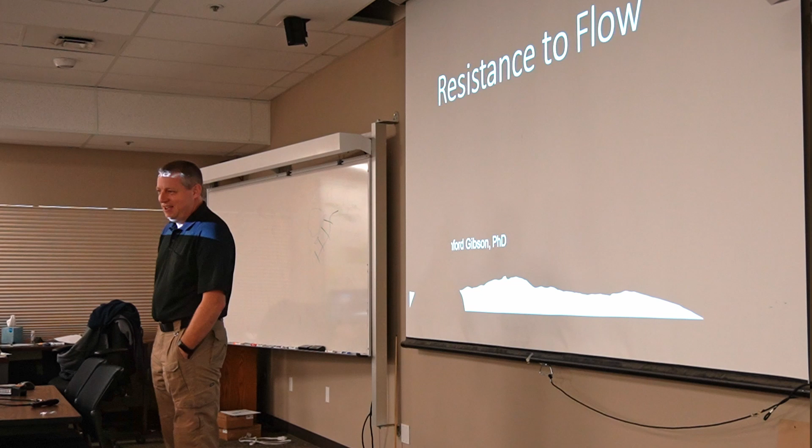They're beautiful equations. And so we tend to sometimes look down at those hydrologists with all their free parameters, and the sediment transport people—what are they even doing, right? Like that's witchcraft. The groundwater modelers, they can't even see all their parameters. We have these beautiful, elegant equations.

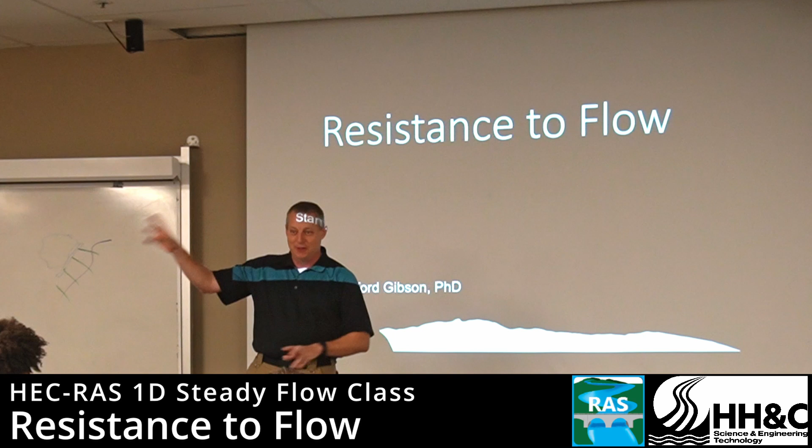Except, do we? We take all of our uncertainty and we put it all in one closet, right? It's like when my kids clean their room—one of my kids will actually go and put everything where it belongs, and another kid will just take everything and shove it under her bed, right? And that's what we do.

We take all of our uncertainty and we shove it under our bed, and that bed is called the Manning's N parameter. Everything that we don't know, we just put into the Manning's N parameter.

So part of the melding between art and science that you're going to have to do as a hydraulic modeler is: you're going to use these gorgeous self-correcting equations, and they're going to do great. And then you're just going to infect them with all sorts of human intuition by choosing a Manning's N parameter.

And that's why we kind of dedicate our whole talk in what is an engineering class to this more intuitive, more felt, more artistic sense of where am I going to come up with this Manning's N parameter.

And so this is the resistance to flow talk. We're going to talk about the flow resistance equations, and a little bit about how this parameter fits into our beautiful equations. Then we'll talk about the factors that affect this, so you know what you're looking for, and then how to determine these.

There's three main ways to determine these: charts, pictures, and equations. There's actually two other ways that I'll talk about, but those are the standards. And then we'll talk a little bit about where these go in RAS, and how you can play around with them in RAS to make them more responsive to what your river is actually doing.

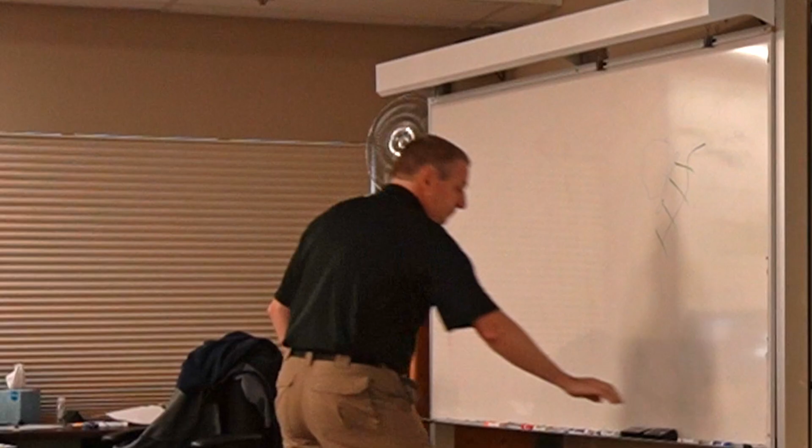I'm going to draw until someone answers. So this might get complicated. The energy grade line, thank you. So HF is the loss of energy between our computational nodes, which in this case are our cross sections, and SF is the slope of the energy grade line.

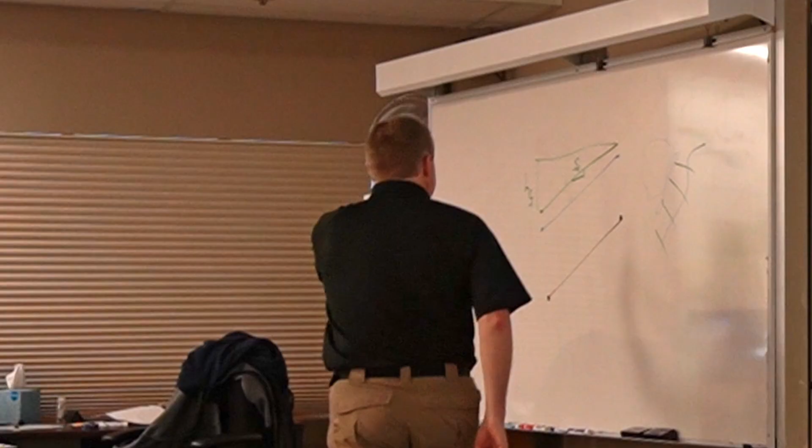Where does that come from? Where does SF come from? How do we compute that? Well, you'll notice there is an S in Manning's equation. That's actually what we solve for, because we iterate on the velocity based on the depth. We iterate on the depth and the velocity, and we solve for the friction slope. The friction slope, this loss, is what we're actually solving for, because we're doing a backwater analysis where we're computing the loss between these. This is what we want, and this is really just the friction slope times this. We get the friction slope from Manning's equation, from the conveyance equation. The friction slope is flow divided by conveyance squared.

What is conveyance? It's a weird idea. What conveyance really is: Manning's equation minus the slope component, times area. It's this conceptual idea of what is the capacity to move flow before you add the driving force, which is the friction slope. But if you just say conveyance is Manning's equation without the friction slope, then the friction slope by definition is the flow over the conveyance squared. And so that's how we do this.

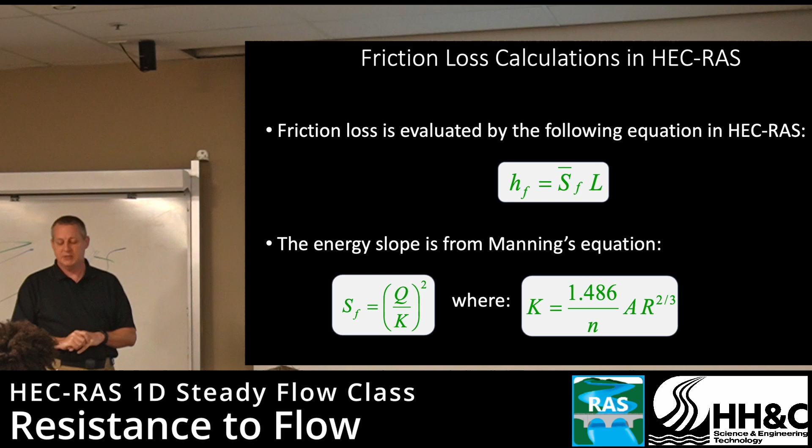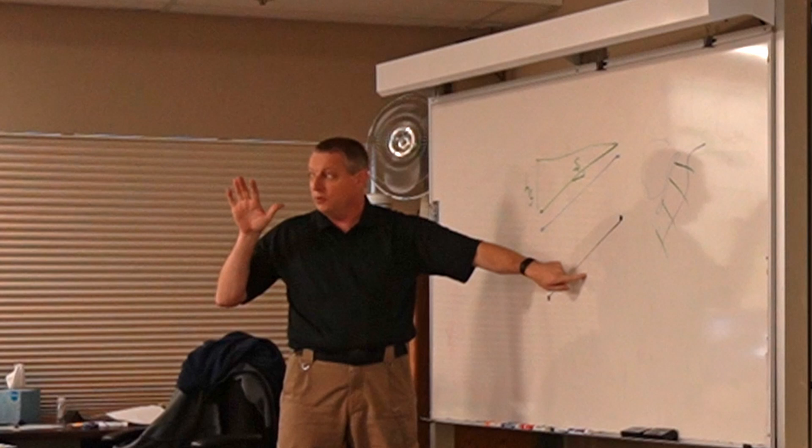That's where Manning's equation fits in. And so if you step back from the convoluted 'what is conveyance' explanation, the answer is: the friction slope, the loss of energy grade, is a function of what? The resistance to flow on the bed, which we quantify with Manning's N. And so now it's turtles all the way down, right? That's kind of how we got here. We're going to use Manning's N to compute the friction slope, which gives us our loss. Okay, so that's how we're going to use it.

Wait, can you say again what conveyance is? Conveyance is weird. Who learned about conveyance? Did anyone else learn about conveyance? I didn't, because it's not a thing. All right, conveyance is not a thing. Manning's equation can solve for V or for Q, right? If you wanted to solve for Q, what do you do?

You multiply everything by A, right? So multiply everything by A, just put an A in there, and now you've got Manning's equation in terms of Q. Okay, what's the driving force of Manning's equation?

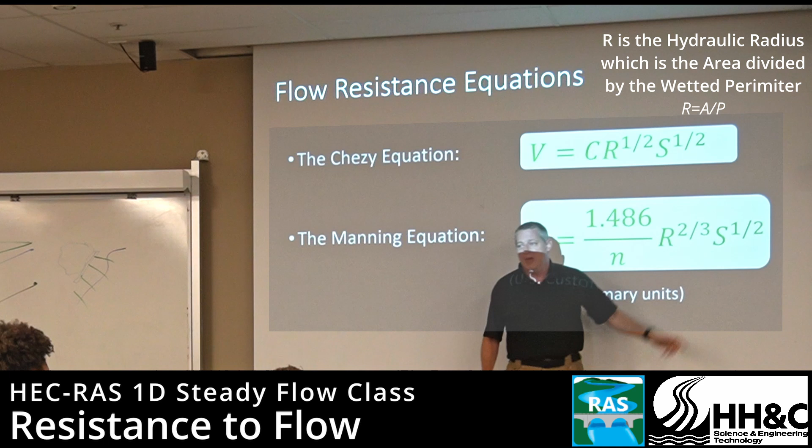I always think about equations like, what's doing the work? What's the engine here? That's partially because I'm in sediment transport and the engines are weird. But what's the driving force? It's the slope, right? None of these other things are driving anything. Actually, it's driving forces versus resisting forces, and then the resisting forces propagate through this. So what's the driving force? It's the slope.

So in a sense, conveyance is Manning's equation minus the driving force. It's the non-driving force portion of Manning's equation, which means essentially it's a flow potential. It's the flow potential that you then multiply the slope by to scale the actual flow potential into flow.

Yeah, the way I've been thinking of it, I just started Googling it yesterday. Okay, tell me if I'm close. So it's basically the ability of a channel to carry water for a given slope.

That's right. So like, for instance, if you have the same cross-section, but it's very shallow, that would be a lower conveyance, because you've got more wetted perimeter. That's right. If you had like a semicircular channel.

That's right. And so if you think about a unit slope, how many slopes do you have? Well, I have one, I have two, I have three. All right, let's just take a unit slope. Conveyance is the ability for your channel to move water given the unit slope.

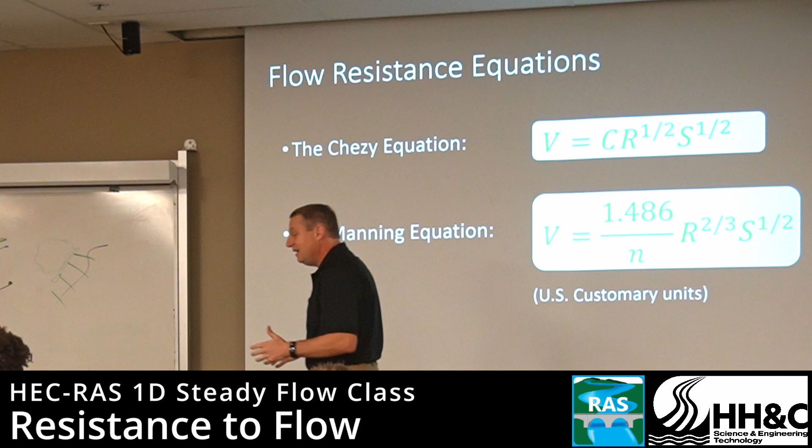If I multiply this now by 2, I'm going to get twice as much flow. So it's a little bit of area minus resisting forces, and then I'm going to apply my slope to scale up to flow. But it's not a real thing. It's more of a numerical trick to isolate the friction slope in our equation. It's Manning's equation minus the friction slope.

What affects Manning's N? When you're going to walk out into the field and try to estimate a Manning's N, what affects it? Well, the first thing that affects it, obviously, is the surface roughness. But we're already in trouble here, because what actually is the surface roughness?

Now you're in my world. Welcome to sediment transport. What actually causes roughness? What sediment characteristics actually cause roughness? Size, the size of the sediment, right? If you've got cobbles, you're going to get more roughness than gravel. Are you going to get more roughness than sand?

No, why not? Why would sand give you more roughness than gravel? Is it because of that? Yes! Sand self-organizes into waves, so sand has emerging roughness properties. Gravel and cobble transport like one grain at a time, but sand turns into bed forms. The roughness of an individual sand grain is almost insignificant, but they self-organize into these waves, and now these waves are a foot. In the Mississippi, they're 30 feet. In the Paraná, they're 45. Those are significant roughness elements that you have to contend with.

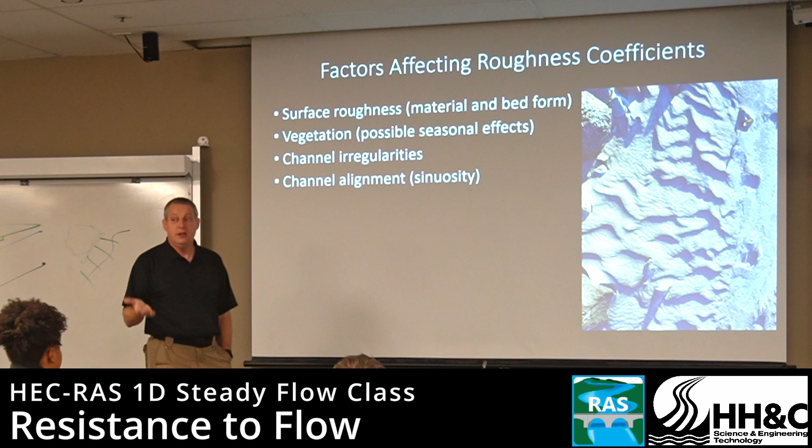So if you think about a sinuous channel, where is the energy going in a bend? Well, you get all of these helical flow effects, things that we don't even get in a two-dimensional model, and to be honest, three-dimensional models aren't very good at them. So you have all of these energy losses in a sinuous channel. The more sinuous your channel is, the more losses you're going to have. Is that channel roughness? It's not. Where else are we going to put it? We put it in the Manning's N.

Scour and deposition. You don't just lose energy based on the roughness of the roughness elements, but if the channel is actually scouring or depositing, you're doing work, and work takes energy. So that can also play into it.

Obstructions - this is again, when we talk about our beautiful equations, you're going to get six hours of excellent bridge content. It's excellent, you're going to love it. It's gonna change your life. And it's so elegant, these equations are so beautiful.

One of the things we're not even going to mention is the fact that almost every flood, your bridge is going to get choked with debris, and you're going to have to figure out how to account for that debris in your backwater analysis. The Truckee River study that Alex showed at the end, that was my first big study when I came to HEC, and that was my calibration, which is why we'll talk about it. I can tell you that calibration wasn't even close until I put debris on my bridges. And yes, you can do that in RAS, but you're going to have to account for it.

And it doesn't just happen in bridges, though. Debris catches throughout your system, and a healthy system has active wood in it, right? So you're going to have to account for that.

Temperature. Temperature is going to affect Manning's N value. Okay, before I show this, what do you think? We have Omaha District here, and do we have Alaska District? All right, Alaska District - where do you think temperature is more likely to affect N value? In the Omaha District or in the Alaska District?

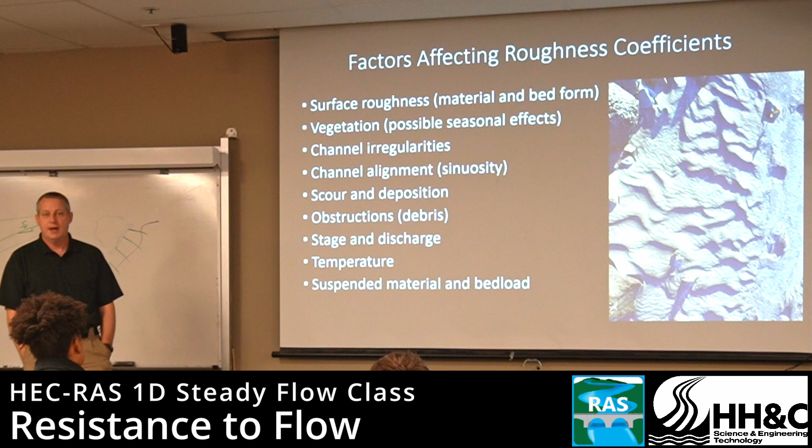And it's because - why? Someone who voted for Omaha - why is Omaha going to be more, the N value in Omaha going to be more susceptible to temperature? That's exactly right. And what kind of sediment are we carrying in the Missouri River? Yeah, mainly fine sand. So think about this.

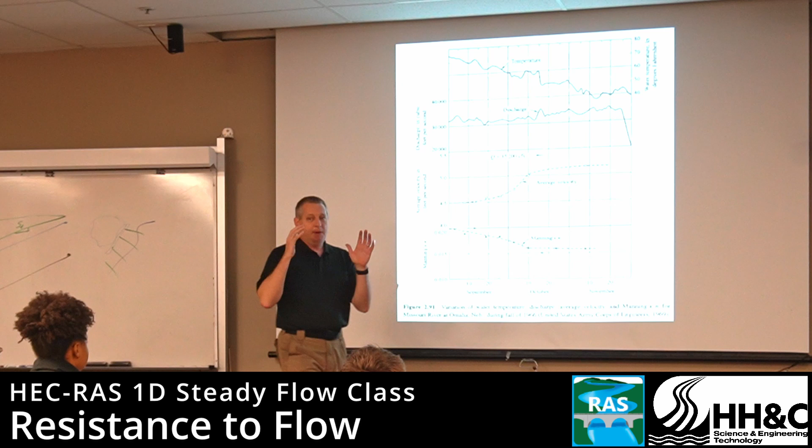In the Alaska District, you're carrying mostly cobbles and boulders, which means that what does temperature do to the water? It changes the viscosity of the water, which changes the ability of the water to move sediment. But how much does it really change the ability to move cobbles and boulders? Not much at all. You can make the water more viscous, and a cobble or a boulder won't move much differently, unless you get ice, and then ice can move cobbles and boulders, but that's a different thing.

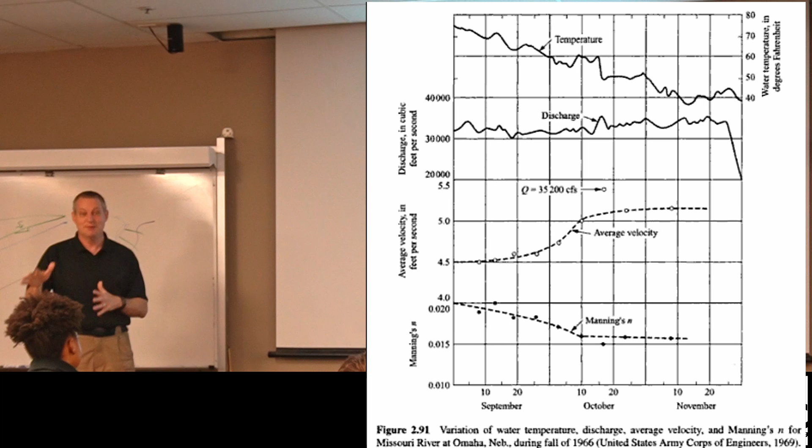And that's because in gravel bed rivers, the roughness element is the boulder itself, the cobble itself. In the Missouri River, the roughness element is the bed forms because of the sand. And so as temperature decreases, the bed forms actually plane out because you've got more shear stress, because the water is - I'm going to say heavier, that's not right - but the water is denser, and so the amplitude of the bed forms drops in response to the increased shear stress of the more dense water.

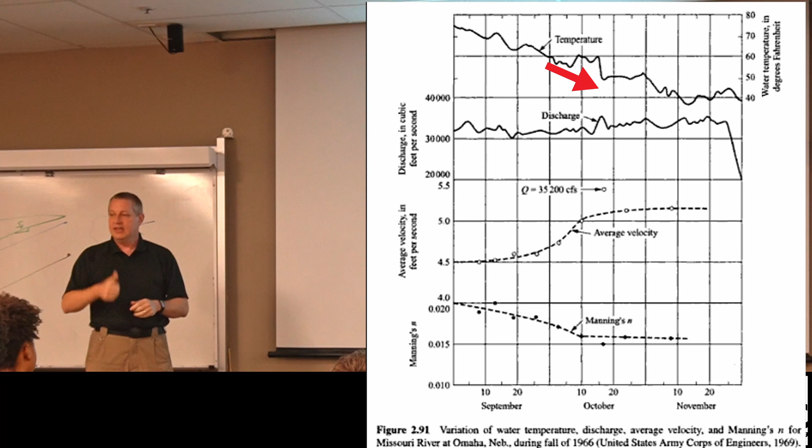So this is a classic plot from the Omaha District, you've got temperature dropping and you've got Manning's N value dropping. The Manning's N value actually drops through the winter and then comes back up in the summer.

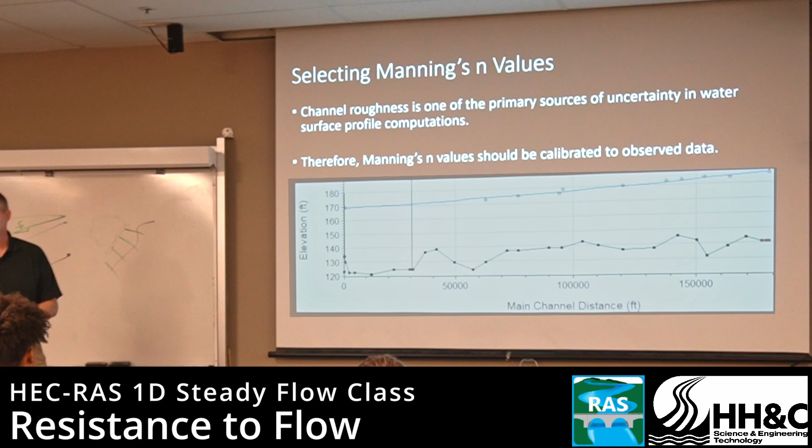All right, so how are we going to figure these things out? How are we going to determine our Manning's N value? We have three that we're going to talk about, but there's two others I want to talk about, and one we're just going to start with. You are not going to estimate your Manning's N value. I mean, you are, but if that's all you do and the report comes to me, it's not going to go well in review.

Uncertain parameters must be - finish the sentence - calibrated, right? If you have uncertain parameters, you need to calibrate them, especially if they're uncertain plus or minus 30%. So how are you actually going to develop your Manning's N values? You're going to calibrate them, which means you're going to need high water marks, which means every time you have an event, you should be sending interns out to the field to survey trash lines. This just needs to be common practice, because you know that if you have an event, someone's going to come to you in two years and ask you to model it. And this just has to be part of district culture.

So this is what I did in the Buffalo district. I'm not sure Paul Morawski's still there, but Paul would come over to my office like, we just had a flood down in Cazenovia. Go shoot the trash lines, and that's how you build this infrastructure to be able to do these models.

Okay, so I'm going to tell you a bunch of stuff, and none of it's true. This is how you get your first guess, but then you got to calibrate it. One of the problems with calibration is that you can get outrageous numbers because there's another problem in your model, called equifinality. So you want to also have good intuition to know what's the range you can calibrate in, and what's a good initial value.

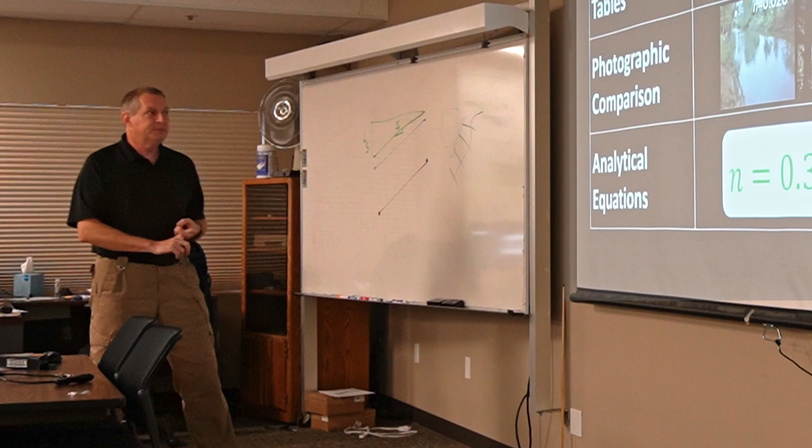And so where do we get that? Well, there are three options: lookup tables, photographic comparison, and analytical equations.

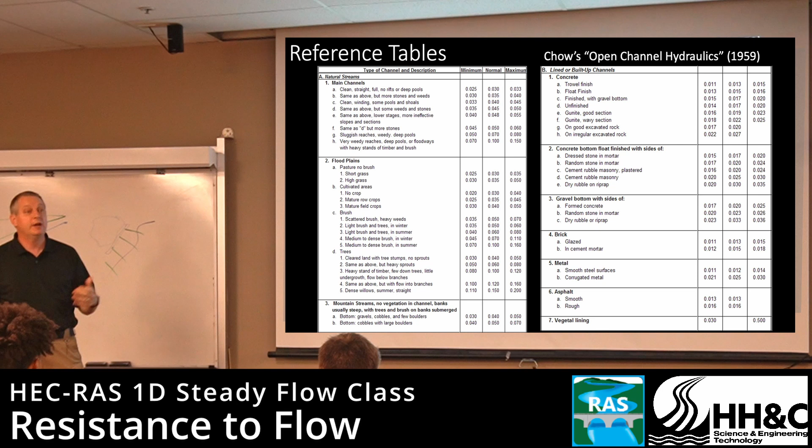Where I do find these useful is for engineered systems. You know, concrete, float finish, unfinished - I don't know what any of these words mean, but there's a structural engineer in your office who could help. These have a much more bounded range, and really what I'm looking for is the upper bound, because I always choose N values that are far too high for engineered systems. So I find that a lot more useful.

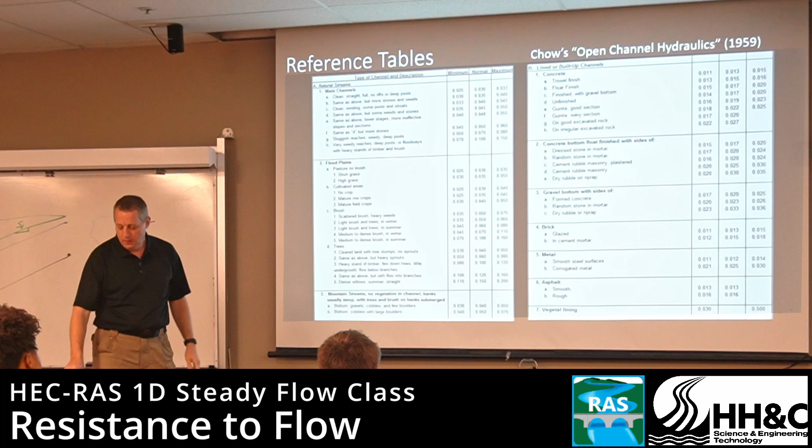Where do you get to these tables? If you don't have Chow because it's limited edition, you'll find that anywhere in RAS that you have this question mark, we will send you to the appropriate portion of the RAS manual.

Okay, you guys heard about F1? Has anyone told you about F1? No, this is why you come to the class. These are the pro tips, the Easter eggs.

Okay, so yes, you can push this question mark anywhere you see one, but what if there's not a question mark? If you are anywhere in RAS and you push F1, we will take you to - if you're online - the appropriate place in the user's manual. That's what we call context-specific help. This is why we actually put all of our user documentation online, and that should become a standard practice, because the user's manual is phenomenal. It's phenomenal, but it's too big - I don't even know where to start. So that context-specific help is really the workflow you want to use to find the right documentation.

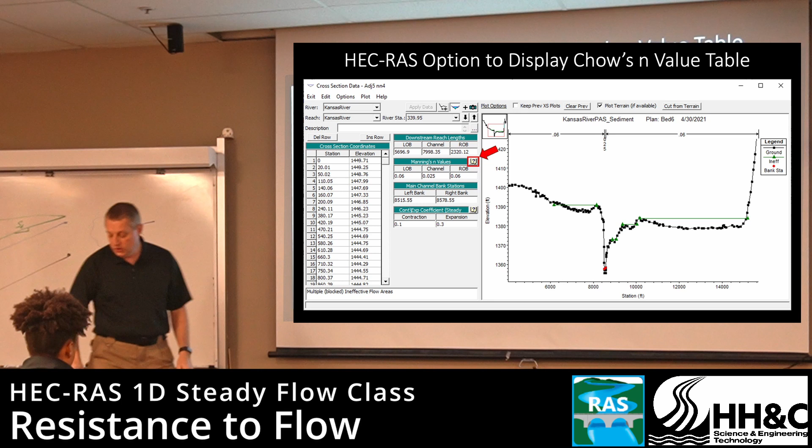Okay, so charts. The next thing that has historically been part of what we do is photographic comparison. There are a number of sites out there where they show you calibrated N values, and you compare your system to them. All right, so we're going to play a game. We're going to play a guess that N value game. If you all shout it out, then none of you will be complicit in the answer.

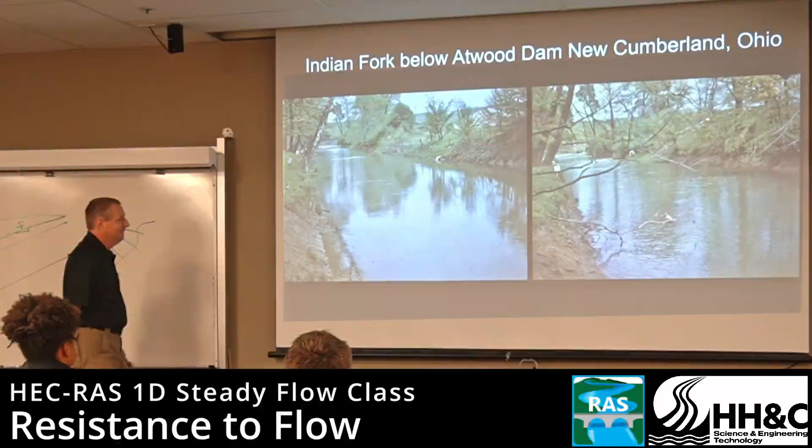Give me some N values for this. I'll give you a hint - these are going to increase, so each N value will be higher than the last one. That doesn't help you with this one, but let me hear some N values. What do you think? 0.02 - sorry, for the channel. 0.027. I'm glad I'm only hearing 2 sig figs.

So I'll give you this bit now. When I review projects, which I do, they come to HEC, I figured out that there is a psychology of review. In the first 8 minutes, I either develop a skeptical or a generous point of view. And that really comes from 5 or 6 things that I check first off. Those are things like: are any of your water surface profiles crossing? How are you using ineffective flow areas? What bridge algorithm have you selected, is it appropriate? And I have to tell you, this one's not fair, but how many sig figs have you used to define your N value? If your N value is defined to 5 sig figs, I'm immediately skeptical - it's gonna affect the entire review. You cannot know an N value to more than 2 sig figs, maybe 3 if you're calibrating.

Anyway, there's that bit. Okay, this is 0.026. A lot of people are pretty close. Why is it 0.026? Well, this is the first time I've tried to do this interactively, because it's so boring for me to just do it straight up. Why is this 0.026? That's really low, incidentally - that's about as low as you go for a natural channel. Well, look how straight it is - there's no sinuosity, there's no debris. You've got a clay to silt bed, but there's no bed forms because it's incised. So this is about as close to an engineered system as a natural system's going to get. Okay, shout them out.

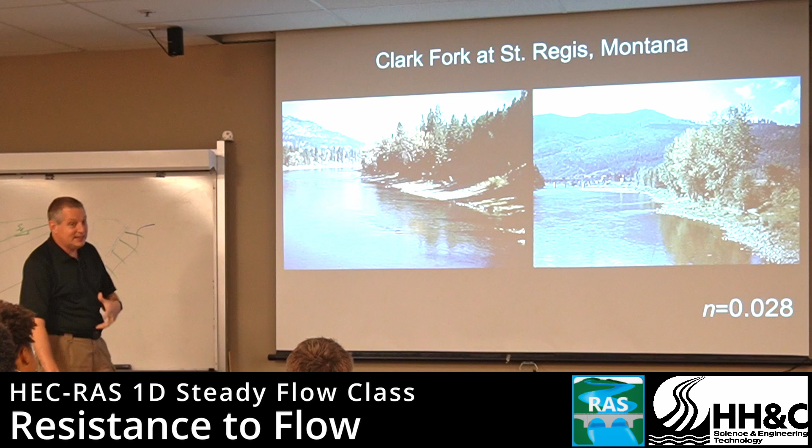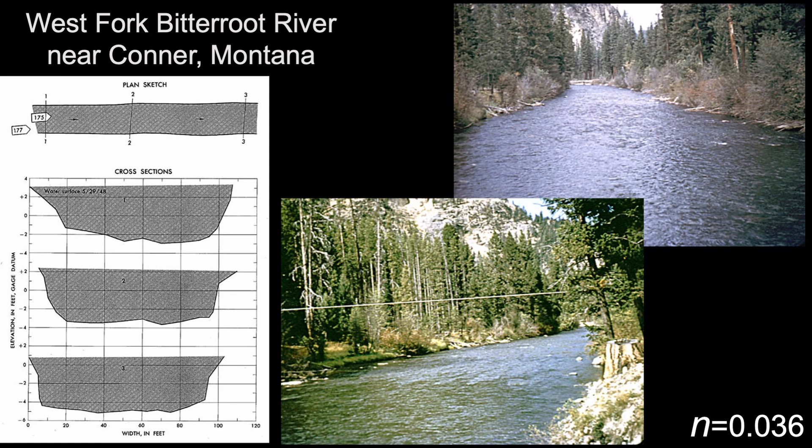Okay, what do you think? 0.035, my favorite n value. My favorite n value, 0.035. 0.05. 0.046. All right, we have covered the range. This is very close to my favorite n value. And this is actually how they came up with it.

This is USGS. We actually used to have a direct link to this in RAS. Now I think you have to go to the manual to find the link. But the USGS, this is on the website. And this is, if I don't know, I start with 0.035. You've got some roughness elements, you've got some sinuosity. It's a moderately sized channel compared to the roughness elements. This is average, basically. This is an average river.

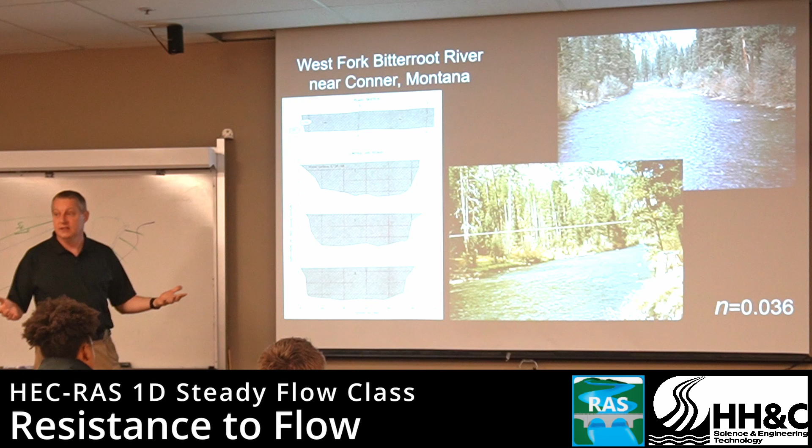All right, go for it. 0.04. Is there ice? That's a great question. No, not right now. Incidentally, what a great question, because if there's ice, what happens?

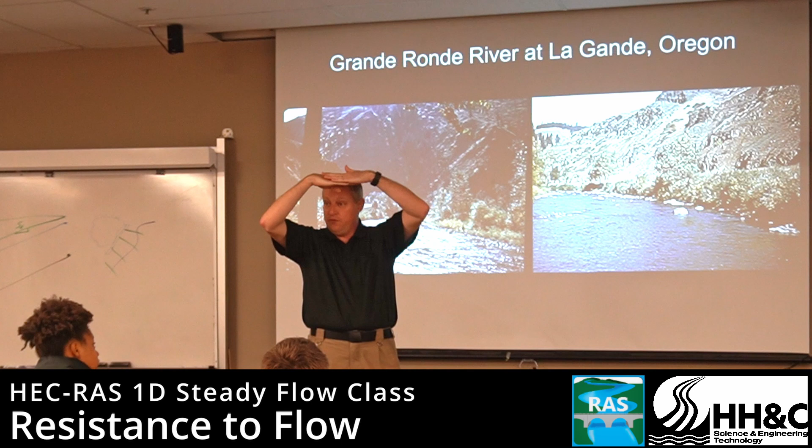You actually need 2 Manning's n values. Why? Yeah, you actually need a Manning's n value for the ice itself because you've actually got two roughness surfaces. And that's different. If you have an ice cover, it's like 0.02. But if it's an ice jam, it's like 0.045. And so that's actually a really big deal. Sorry, I digress. Anytime, I'm very distractible. Squirrel.

If you go down gradient into like the Missouris and the Mississippis, and you start getting below the 0.03s, that's kind of the way I think about this. Okay, let's do a couple more.

All right, now we're farther, yeah. I have a question about these n values. Is this just an average n value for the entire system? For the reach. So basically what they do is they took 3 cross sections, and they didn't use RAS because it was pre-RAS, but they basically did exactly what RAS does and calibrated the n value to those 3 cross sections, which is part of why these are all straight reaches.

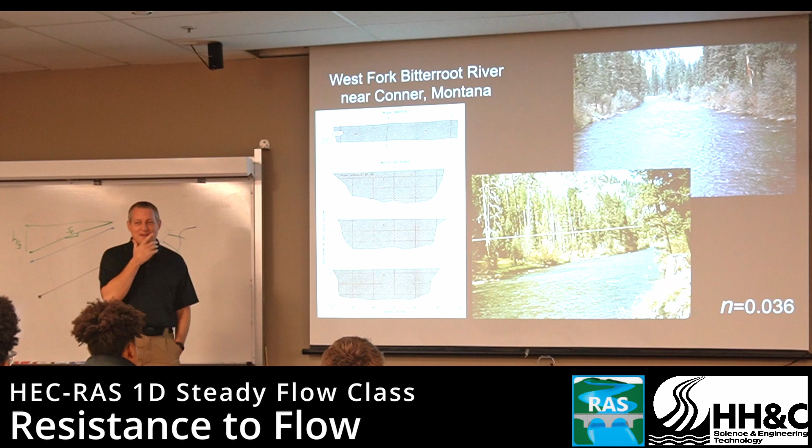But you're going to do the same thing, right? I remember the first time I learned RAS in grad school, and I remember the professor, Professor Hoops, took us out, and we took our cross sections, and then he asked me to come up with a roughness for that, and I was like, well, the roughness for that or the roughness for that, because it's very different, right? So you are going to have to do this artistic conceptual integration.

All right, let's do one more, and then there it is. Okay. 0.057. Thank you. Yes, good, good.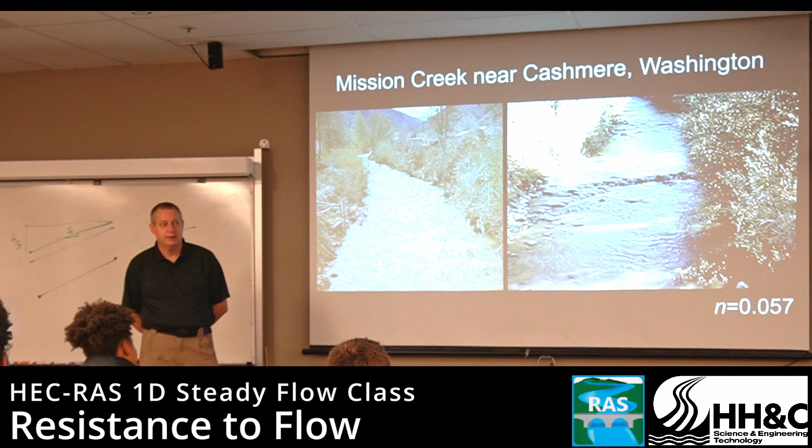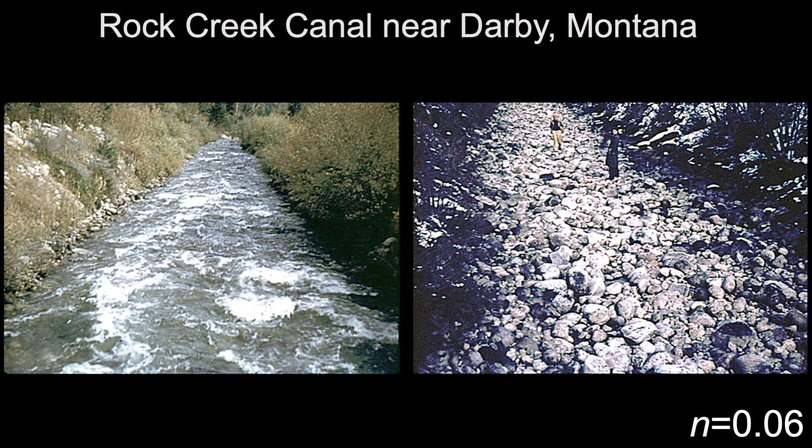The first time I had to use a 0.05, I felt like I was cheating. I felt like it was wrong. But you get up into high gradient systems in the mountains, 0.05s are pretty common. 0.06s, not so much, but you can run into them in high gradient systems.

And then, maybe, yeah, I guess that's the high bound. That's the high bound for a channel. Of course, overbanks are a totally different story. Overbanks, 0.07 is kind of where you start, unless it's an urban system. An urban system can be 0.03 if it's a parking lot, but if you've got houses and you're accounting for the houses, it actually gets up to 0.07, 0.08, 0.1 pretty quickly in your overbanks.

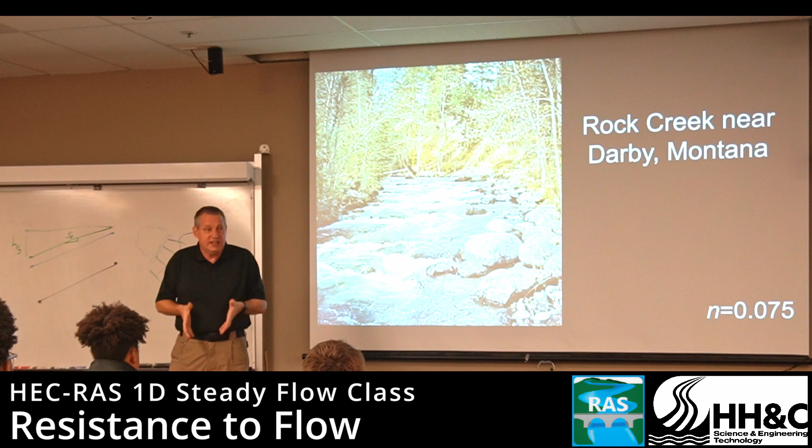Which is more sensitive, your n value in your channel or your n value in your overbanks? It is channel. Why is it channel? Because you have flow. Yeah, I would say because you have more conveyance, but flow is actually the right answer. The channel, and it's because it has the lower n value. You have more area—this is why conveyance is a thing, right? You have more area of flow in your overbank, but you have more conveyance in your channel. And the higher conveyance channel is going to be more sensitive to the n value. So the point you were talking about with the block obstructions or the houses.

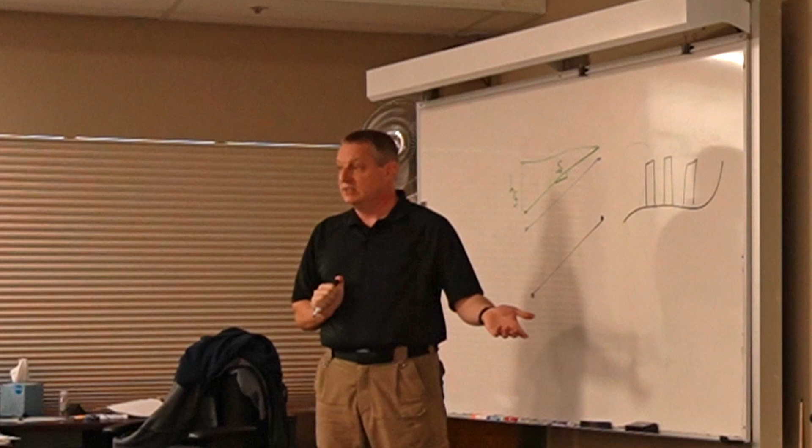So if you're accounting for houses in your model by using block obstructions, do you still have to account for them with your N value? This is a great question, one you might get different answers on from each of us on the RAS team. The question is, if you use blocked obstructions to model the houses, do you have to account for them in the Manning's N value too? The real question is, what are you trying to do with your Manning's N value?

The weird thing is, if you don't do this—and I'm going to suggest that you don't—then you're actually using your Manning's N value to remove conveyance. Do you see that?

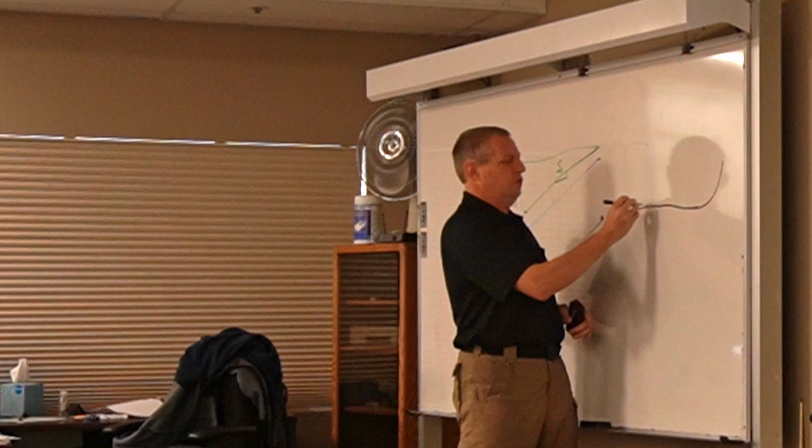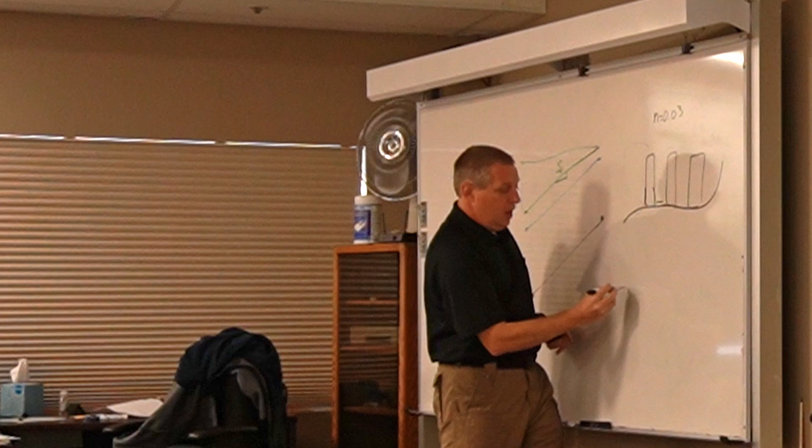There are two ways to model this. One is you put in your houses, and these are streets which will have a Manning's N value of 0.02, but there's turbulence and weird things going on, so we'll use an N value of 0.03 here. You'll have roughness at the edge of your buildings, and that works out. Or you can model it as a floodplain and just use an N value of 0.07 and get the same answer.

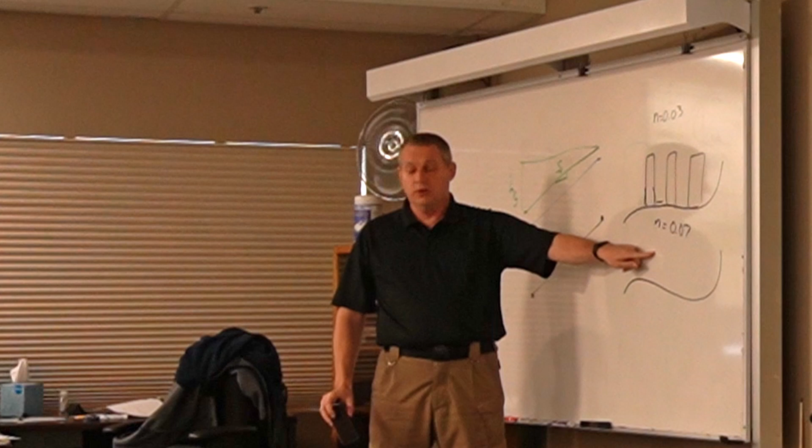So what you're really doing is saying N and A are both in Manning's equation, and I'm just trying to get an effective conveyance. So I'm actually using N to remove A—that's what you're doing here. So this is more correct.

I like this approach better. I'll give the calibration talk on Thursday, and I have strong thoughts on calibration, most of which you won't get until the sediment class—then you'll get them all. But because of what's called the equifinality trap, I try to minimize my free parameters.

This approach has two free parameters, because those are the houses at that cross section, but is that really a good integration of the houses throughout the system? Are those houses filling with water or not? What kind of inner-house turbulence are you getting? And what about cars? Do you really trust this representation of reality?

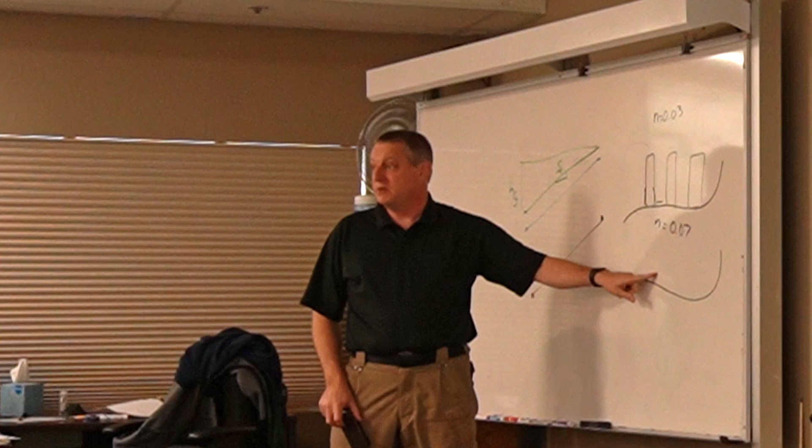In general, I like to go with a simpler representation of reality in a simpler model. So the answer to your question is yes, you could account for them in N, but I tend not to do it—I tend to do this instead.

All right, the last thing is analytical equations. There are equations to come up with Manning's N values. I inherited this material, so I'm going to show you Cowen's method, even though I think it's a little bit silly. This isn't really an equation—it's more of a conceptual model.

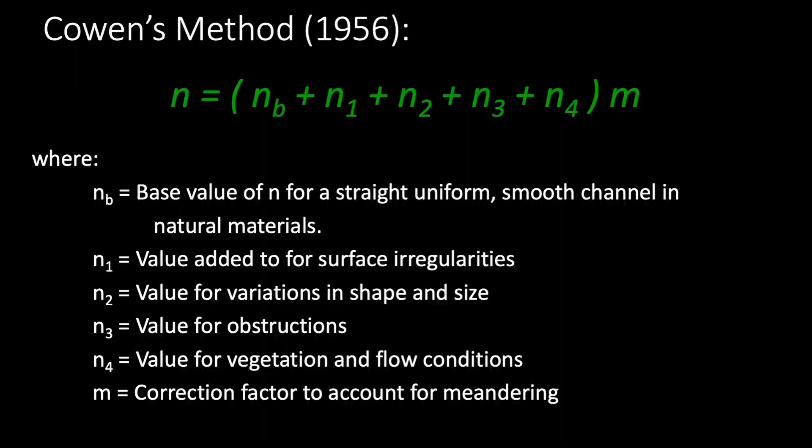The idea behind Cowen's method is you think about all the components adding resistance to flow in your system, then add them up, since N is linear and these are additive—except Cowen treats meandering as a correction factor applied to all of them. This isn't a bad exercise to sit down with your team and do to come up with an initial Manning's N value, though I find I don't have any intuitive sense for any of these.

It's part of the history of the field, so we'll talk a bit about it, but I don't tend to do this or see it in Corps reports.

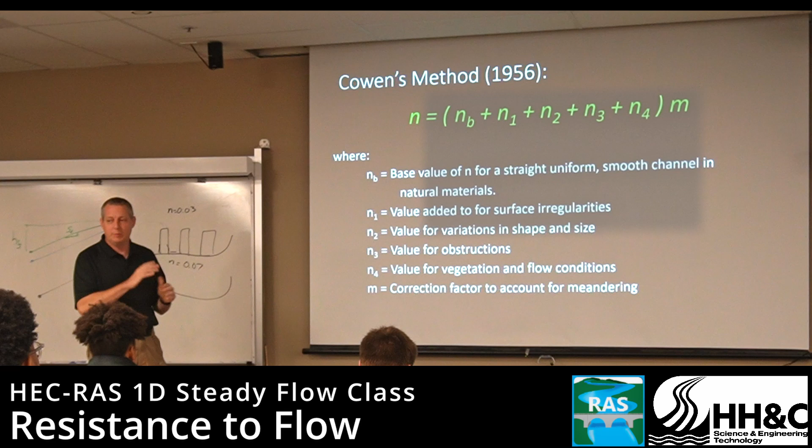The Limerinos equation is something I do use. It uses two variables, the hydraulic radius and the D84. Those of you who took a geotech class might remember what the D84 is—you line up all the particles from smallest to largest, like in elementary school, and then take the 84th percentile particle.

Why 84? Does anyone know? That's a weird number—1 standard deviation above the mean. We often think that's silly, which is why you sometimes see the D85 instead, since 84 seems like statistical snobbery. But it is 1 standard deviation above the mean. So basically, you're coming up with a roughness based on the grain size of the material, which should work well in sandbed rivers or cobble rivers.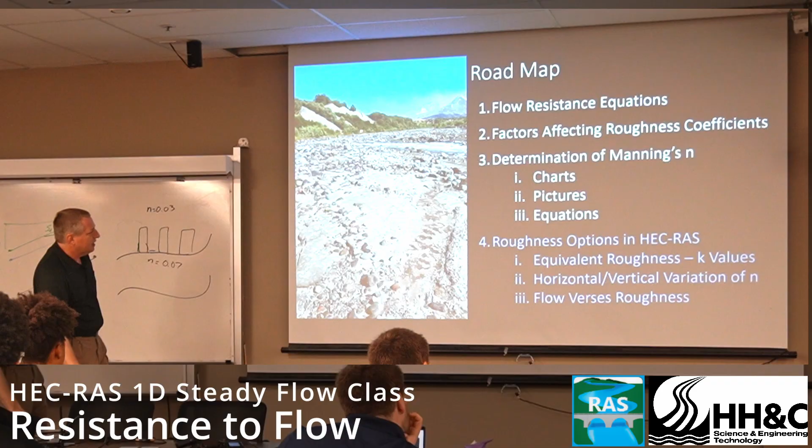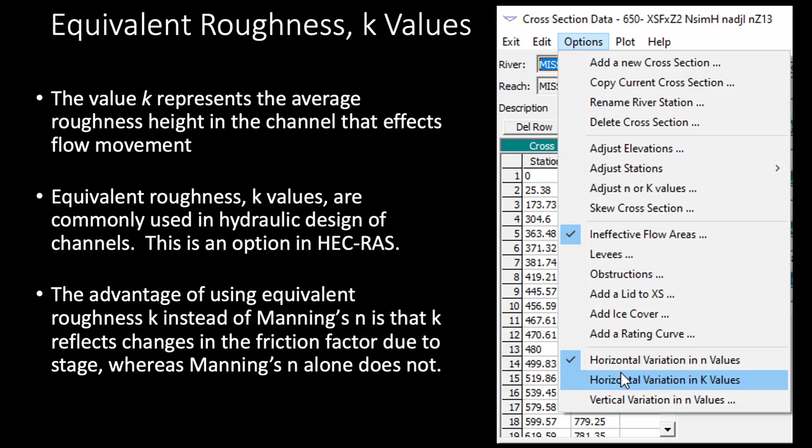There was a thinking early in the 20th century that wouldn't it be nice if we weren't actually talking about this empirical parameter, but that it was actually something you could measure. This actually comes from material sciences, pipe people use this. The idea is, what if we had an equivalent roughness height value? You can actually go out and measure the height of your roughness element.

You can already start to see problems with this, because we've already talked about all the uncertainty in the N value that isn't just the height of your roughness element. But this was a popular way of thinking, so the idea is you can go in and put these K values into RAS. We'll turn these roughness height element values into an N value. There's an equation for turning K into an N value, or we'll even turn them into a Chezy value.

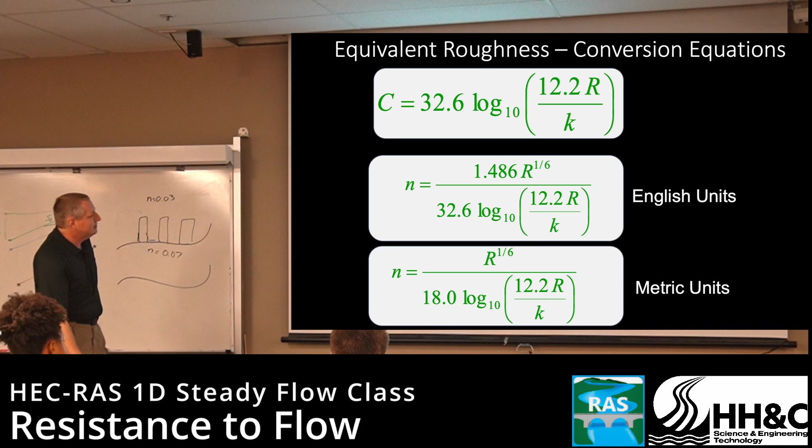But a lot of times this comes down to stakeholder comfort. I find that often you'll be dealing with a local stakeholder who had a very particular education at a very particular university, and has a very particular sense of what's right. I find that in general, if I can say sure, we'll do that, everything goes well. You don't want to fight the other scientists in the stakeholder teams, so if they want to use a K value, sure, let's do it.

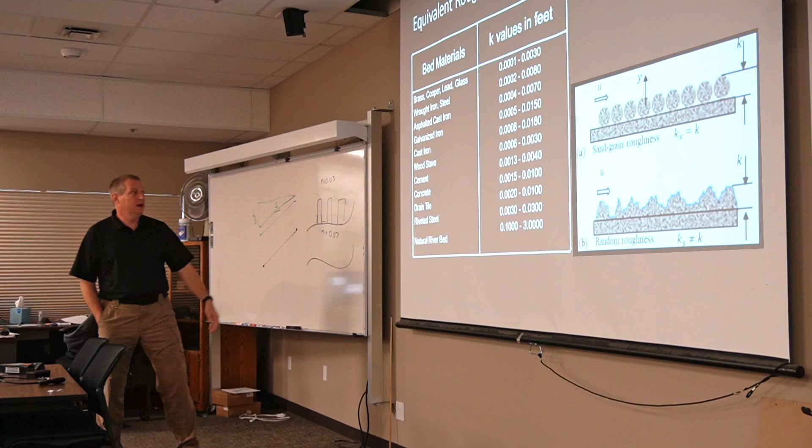It is more common for engineered materials, though, because in engineered materials you're often using pretty straight channels without a lot of debris, hopefully, or sinuosity, so a lot of the roughness does come from the roughness element. And these are actually in feet, which is hilarious to me. This actually gets down to kind of machine precision of what is the actual distance of the roughness, and then we'll turn that into an N value based on equations.

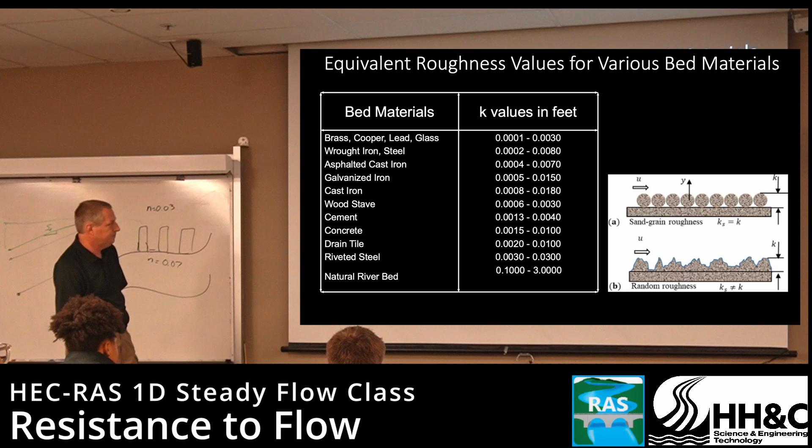This is where you put N values into RAS. You get a left overbank, a channel, and a right overbank N value. But what if you want more than 3? I often don't, just to be honest. I often think that really detailed N values are overspecified. I don't know my N value plus or minus 20%, so the fact that I can put in more than 3 isn't super helpful to me.

But you can, and what you do is you ask for a horizontal variation in N value. I'll show you how to do that in a minute. Then instead of just getting 3, you go in and put in an N value every time it changes. This can be a little weird because it feels like maybe you want to fill in all this space — you don't have to. It's just every time the N value changes from left bank to right bank, you put in the change. You can have as many as you want, but don't — I see a lot of models with 20 N values across them, and I just think you don't need that. You don't know that. Let's keep it as simple as possible.

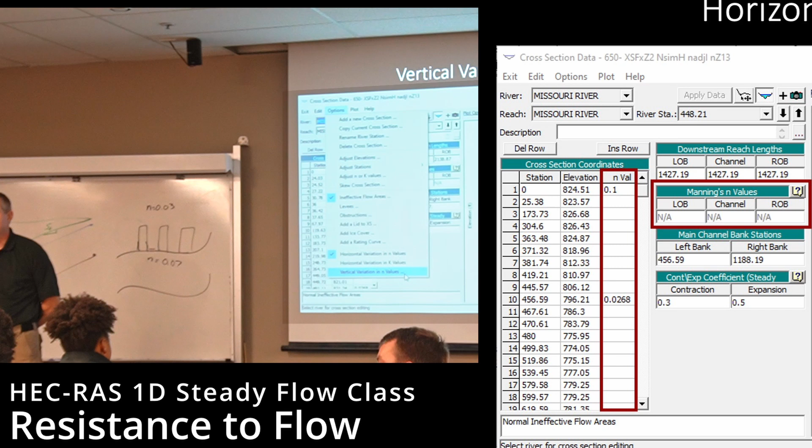Then you have vertical variation, yeah. Does that auto-populate if you use — yesterday during the workshop they showed us a method to input N manually from the NLCD cover, so will that just... Yes, and I'm going to show you that, you're anticipating something as well. I'm going to show you that in the little demo here.

But this is how it comes in from Mapper. So if you were just bringing your N values from Mapper, which more and more is becoming the way to do it, even if you only have 3, it'll come in like this, and you can just leave it like that. That's fine. I'm going to show you actually how to convert it back if you want — that's better done in a demo than on a slide, though. Yeah, great question.

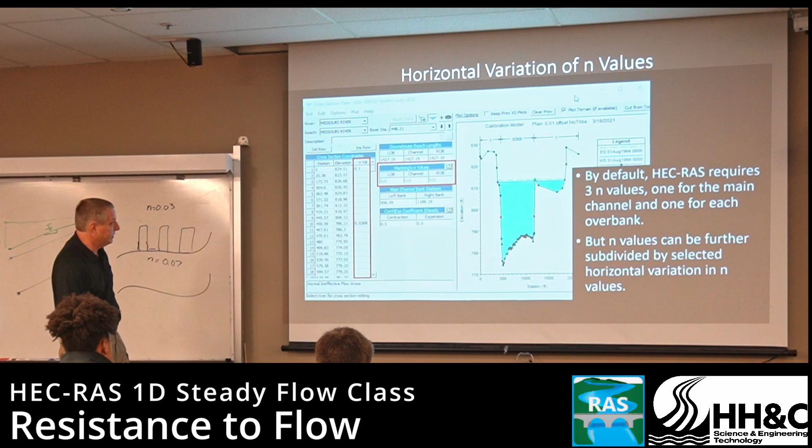You can also do vertical variations in N value. What if you have these kind of interesting islands that change N value at different depths? Really strange things going on with your depth relationships, things like that. The vertical variations in N value is very data hungry, and you can essentially make a matrix between water surface elevation and river station, changing your N values in a very detailed way. We don't tend to do this — I've only used this once.

It was on the Missouri at Gavins Point, where the bars of the reservoir deposition, as you got higher water surface, the vegetation flattened, and you got a different N value.

That's the only time I've ever used it, because the n value change was only in a very specific island. It wasn't across the whole cross section. So if you have n value changes with water surface elevation in a specific part of your cross section, you can use this vertical variation with n value. But we almost never do because it's very data intensive, it's just incredibly tedious.

So thinking more of this situation, right here, where there's a high point in the split channel. You can see that in this model, they actually did put in an n value for the channel, and then they have an n value for the bank for this part, which I do sometimes see and I'm not against, because that actually is often a very different n value. And then they have another n value for this transition, which I probably wouldn't have done.

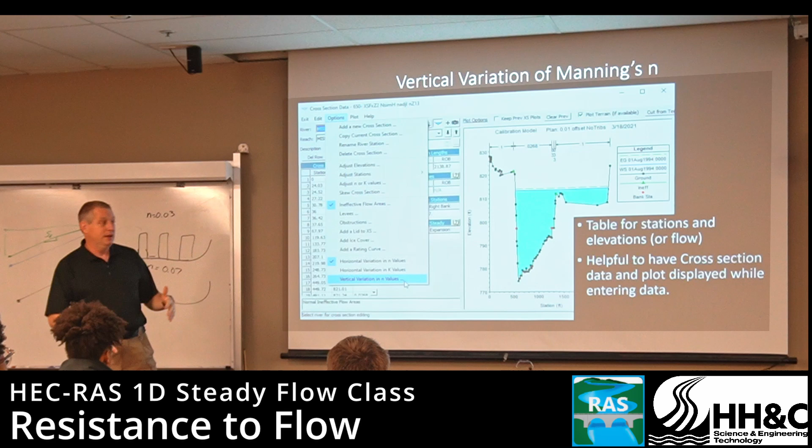If I was reviewing this model and you said, hey, this is vegetated, this has a separate n value, and you put in a separate n value, I wouldn't balk at that. I would say, oh, that probably is true. It might not be necessary because you're outside, in this floodplain conveyance, velocity is low, it's going to be very insensitive to that result. But also, if I knew vegetation was there and you didn't put in a separate n value, I wouldn't balk at that either, because lumping all of that together is fine.

And the reason that we don't use the vertical variation n value unless you have a very specific part of your cross section that's doing weird things is because we almost always do use what we call the flow roughness factor. I usually use particles here, but Ken asked us about rigid fictional plants. So let's use Ken's rigid fictional plants.

I just did it - the podcast coming out on Friday is with Joanna Curran from the Seattle district, and she did a bunch of flume work with rigid fictional plants that actually didn't turn out to be rigid. They actually bent over, like actual plants do.

But let's consider these rigid fictional plants. I won't make them green because they're fictional, so I'll make them purple because plants don't behave like this.

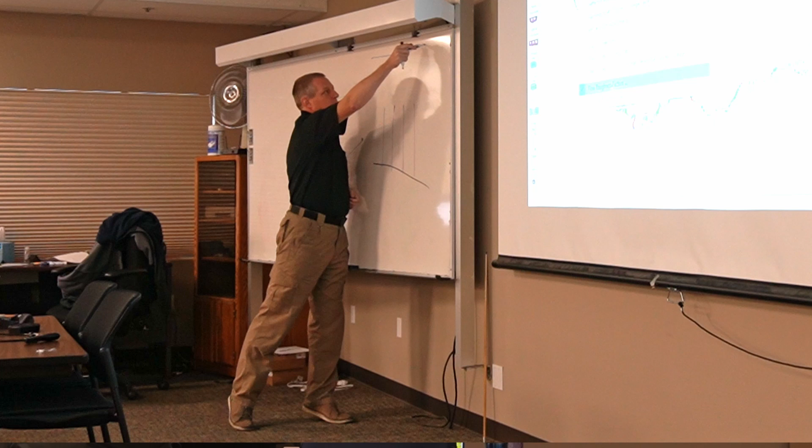Do they produce the same n value for this water surface elevation or this water surface elevation? Let's say that this calibrates to n equals 0.39. What should this n value be - higher, lower, or push? Give me a thumb - higher, lower, or push?

I'm just looking for participation, I'm not evaluating any thumbs. I'm going to do the Caesar here - it's going to be lower.

Why? If I was to estimate, I would estimate something like that. Again, this is all fictional - these plants are fictional, these n values are fictional. But trend-wise, this tends to be where things go. Why? Well, because the roughness element is a larger percentage of the flow field, and so it's just acting on the flow more.

And the Manning's n isn't physics - this is an empirical parameter. So stuff like this ends up mattering. And so I actually had a look - oh sorry, I need an O in there, these are way too high, sorry, order of magnitude. I had a little bit of a debate with a professor about whether this is true in 2D as well.

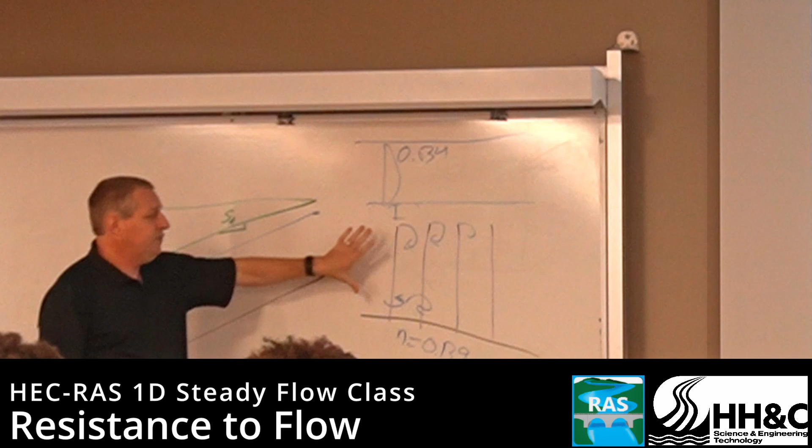That's what we see. You will not be able to calibrate both of these to the same n value, which means - and we'll talk about this on Thursday - you should not calibrate to one water surface. Because if you calibrate to multiple water surfaces, you will see this effect. So in general, if you're dealing with a single roughness element, increases in flow decrease your n value.

Do you have a good handle for how much the n value always changes? I wanted to write this paper - in fact, I tried once. I collected 20 of these, 20 models that had n value variation, and I did a little talk about this at a little conference.

It's art, not science, I don't...

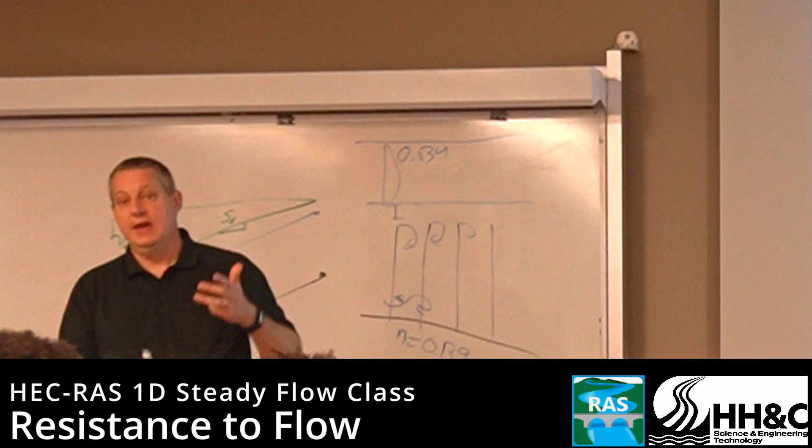Which is why the best practice is to calibrate to three events, and we'll talk about this on Thursday. Calibrate to a base flow, which is easy—you'll always have a base flow, you can go get it at any time. Calibrate to a bankful flow, which isn't as easy but not that bad—you have a 50% chance of having bankful flow during your project. And calibrate to a flood flow, which you will generally not see unless something weird happens.

So then your default N value, like the ones in the tables, should that be your base flow N? I like it to be my bankful flow, but that's because I'm a sediment transport person, and the whole world revolves around bankful for me.

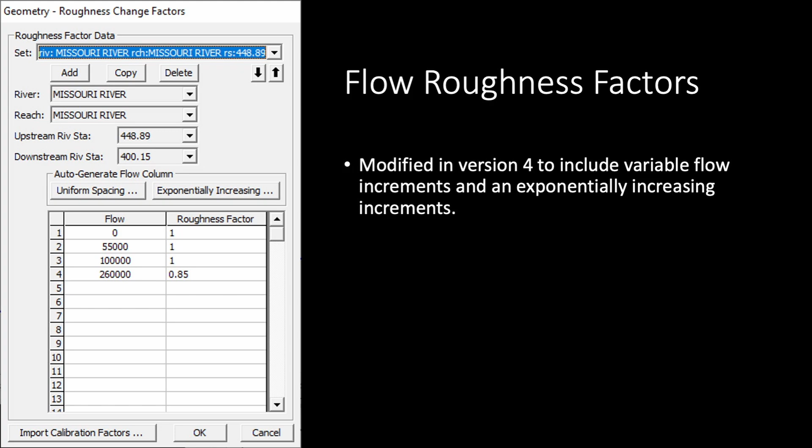But here's an example. You choose a reach—and this is why we don't use the vertical variation N value, because that thing is a beast and this is easy. You choose a reach because this can be different for different reaches of your river. If you've got a mountainous reach, it's going to be different than the sandbed reach.

Actually, before I show you this, let me talk about that. Let's say that you have a sandbed river, so your roughness elements are dunes. Now your N value is 0.023.

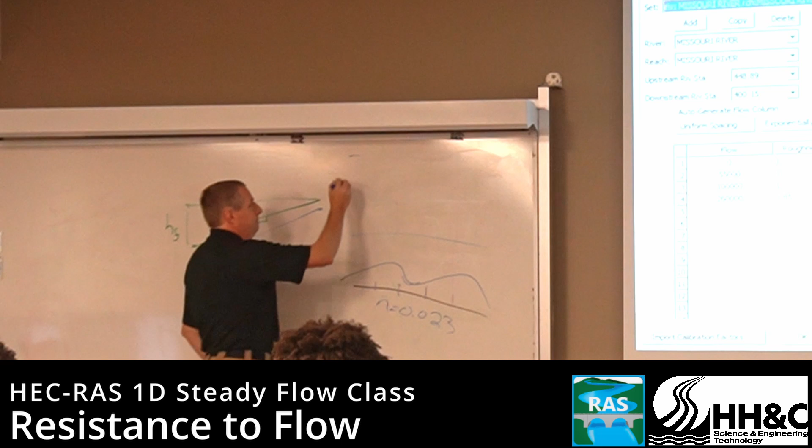Your flow increases. Is your N value going to increase, decrease, or stay the same? Remember, there's no way to learn something better than to be publicly wrong about it. In this case, this is why that paper is going to be very difficult to write. Increases—and there's no reason you should know this until you take the sediment transport class.

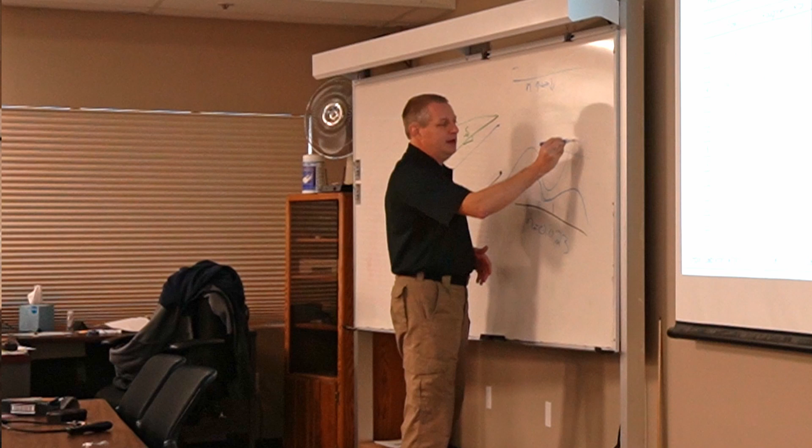Because what happens with a higher flow is you get higher amplitude bed forms. So your N value actually increases in these large rivers, until it doesn't—until you get too high and they wipe out, which is why the Missouri is so hard.

Have you seen that the bed form is always proportional in terms of the area that it covers of the conveyance path of the water? No, in fact not even close. Not even close. There's one really weird thing that happens though.

At some point you get to a high flow, and then we see the same thing as we saw with temperature—you go into a new regime, and these plane out. So on the Cowlitz in the Portland district, when you go from 40,000 to 50,000 CFS, your water surface elevation drops. Yes, I said that right. You increase your flow 25%, and your water surface elevation drops because you go from bed forms as your roughness element to a plane bed.

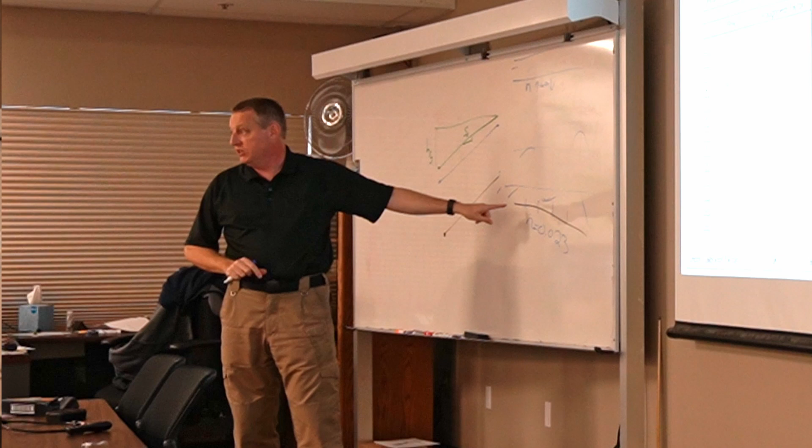You go into a new bed form regime, and you go from an N value of like 0.03 to an N value of 0.023, and it overcompensates for the increase in flow. It's a big deal on that river, and this ends up being non-monotonic. That's one of the reasons why that paper I want to write, and that guidance you want, is so difficult—it gets into my world of what's going on down where you can't see.

So how do you do this? Well, once you calibrate to these three water surface elevations and you know what's the trend on your river, you can define the reach, the upstream and downstream cross section, and then give it a range of flows. You choose one flow that will be the kind of standard—this is what the N values are for.

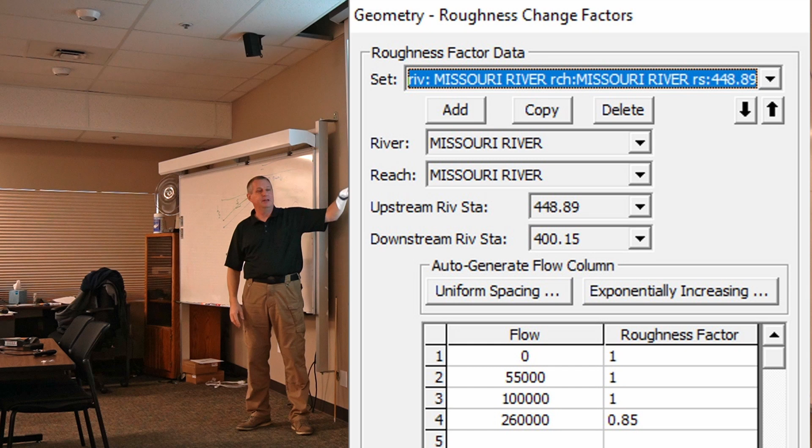Then for the other flows you can give them a ratio. So in this model, all of the low flows—and this is obviously the Missouri because a low flow is 100,000—all of the low flows are 1. But when the flow increases, the bed forms, in this case, are decreasing because it's for the 2019 event where they ran out of sediment. The flow increases, so you want to scale your N value down 15%, and we will linearly interpolate between that and that.

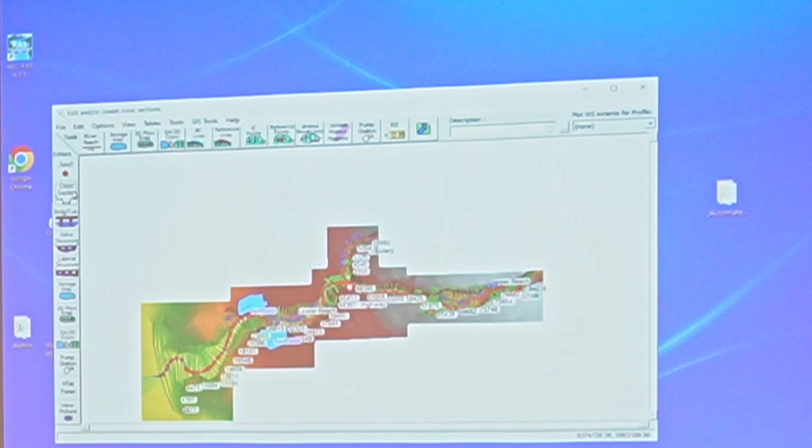So you don't have to run 3 models—you just apply your scaling factor to the reach, and we will decrease or increase your N value based on this relationship. As you saw, these data came in from Mapper, so even though we only have 3 N values, they're showing up as horizontal variation. That's fine, there's nothing wrong with that. If I saw that as a reviewer, I'd just think, oh, they used good N values and brought them in from Mapper.

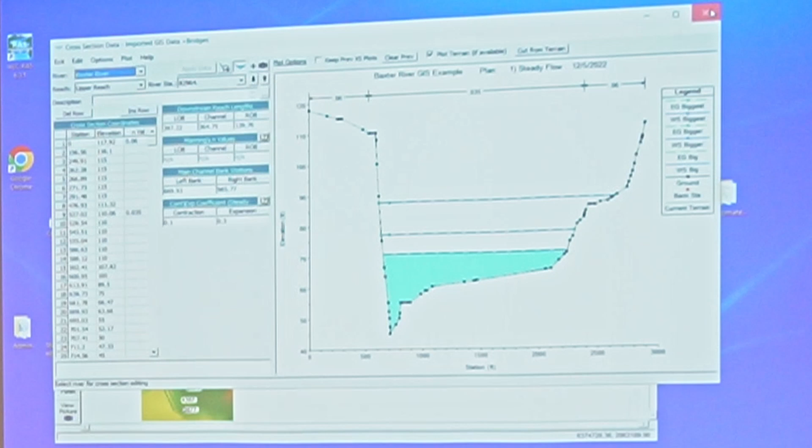What you can do if you want a little bit more control is come into the tables, and this is a place where I spend a lot of time, the Manning's N value tables. You don't want to change these things by cross-section; you want to be thinking about them globally, or at least in terms of reaches. These are the edit options for the selected area. For quite a long time I didn't know that was true and didn't think this worked. I'm going to select the whole area, but actually this only works for the river and reach I've selected. I could go all rivers, and now it's everything. Then I'm going to select it.

This is cool because if you want to try a higher N value, you can come in here and say, hey, I want these N values to be 10% higher, so I'll multiply them by 1.1. You'll notice these are all like N value 1, N value 2, N value 3. This button will allow you to reduce to left, channel, and right. Since you only have 3, that's going to work out really well. I'm going to do that, and it asks if you want to, and I'll say yes.

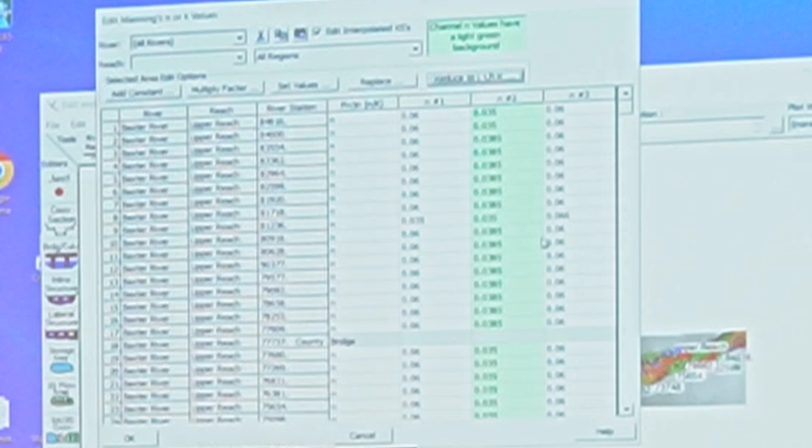Now you can see we're in the left bank, channel, right bank framework, and if you go to your cross section, your N values are in that classic left, channel, right framework. So if I want to change all of my left overbanks because I want to account for houses—I had them in as blocked obstructions but didn't like that, I took them out and want to raise all of them—I can go into that table and say these are all going to be 0.08. That's how you go and change sections of your N values.

The other thing you'll want to know is to do the horizontal N value, you come in here and it converts you back. Let's say this is actually a parking lot, so everything between that and the channel is going to be 0.03. I'm going to come down to 0.814 and make that 0.03. I'll apply, and now you can see we have our 0.06, then our parking lot of 0.03, and then the rest of our channel.

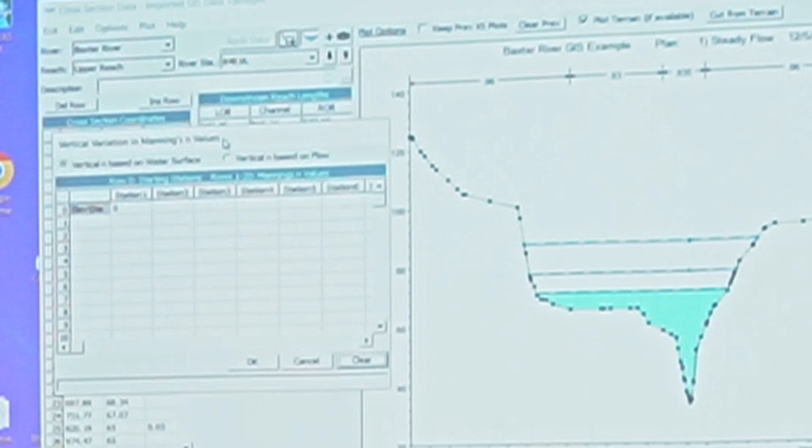The vertical variation—this is also where you get the K value, which I've used once in my career—and the vertical variation of N value, I'll just show you that chart. Again, that's very data hungry. I've also only used it once in my career because in general I use other tools.

This is where you have the seasonal roughness factors, if you have say macrophytes that grow and make a big difference. But on almost every project I use the flow roughness factors. In the flow roughness factors, you choose your river and reach, your upstream and downstream affected cross section, and then give it my bankful flow—that's a 1. As the flow increases to 20,000, I get a 10% reduction, and as it goes to base flow, I get a 10% increase. It will linearly interpolate between those values.

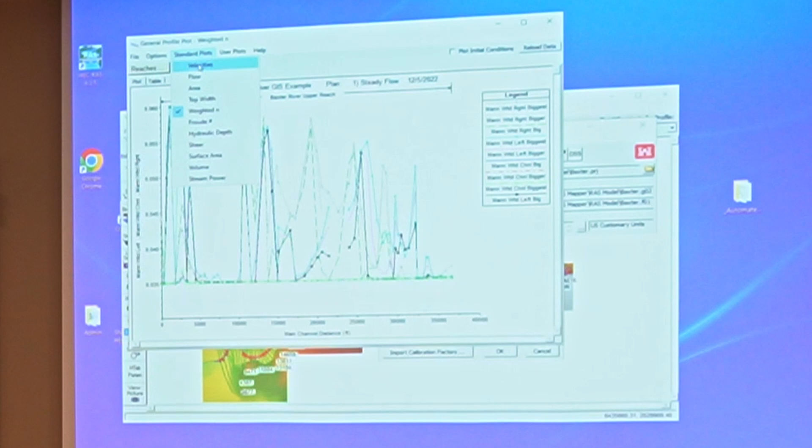You can plot your N values. So when I run my result and do this, you can plot your N values, and I do this all the time—this is a place I spend some time. These are the standard plots, and then this is the plot of anything else you want to see. These standard plots, flow, I look at that all the time just to see how the flow is changing through my model, area all the time, top width. And this N value, the weighted N value shows you—and I can go in here, and that's really busy, so I just want to look at my channel for now.

Now I can see that there's shenanigans going on here. What this will show you—right now I'm looking at all 3 of the profiles—is that actually the N value of my channel is changing with flow. That's a way to represent that and see, along your profile, how your Manning's N is changing and responding to your flow roughness factors.